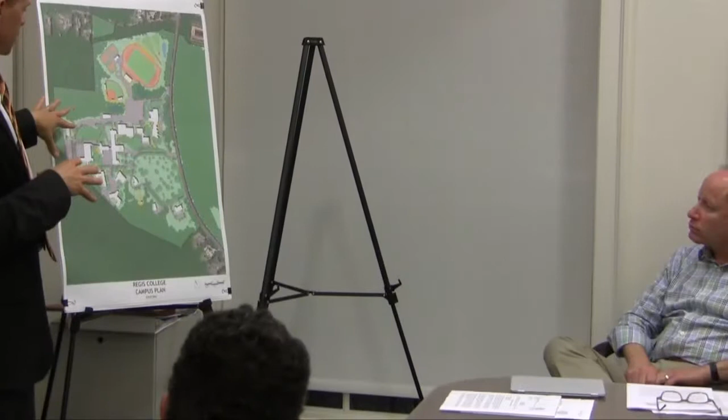We'll move through this relatively quickly to keep in the time frame. Just to orient people, we were here a month or two ago. Orientation of Wellesley Street here on the side. This is the existing conditions for the campus: the Great Lawn, College Hall, the main academic building, and sports fields to the north. We're really addressing the core here, specifically the addition to Maria Hall that was discussed during the site walk this morning.

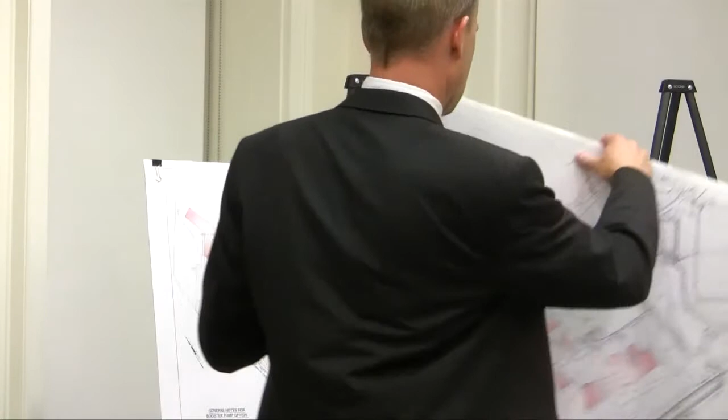President Hayes mentioned that part of the overall project deals with life safety issues, including upgrades to the physical plant at Regis College, both water and electrical, to address specific building issues. Steve will talk about that briefly. We have the water distribution and electrical distribution shown on these two drawings.

To go over the systems quickly, this utility upgrade on campus mainly consists of a water system and an electrical system. For the water system, we're proposing to install a new booster pump station for both domestic and fire flows on campus, to increase water pressures available at the top of the hill, since they're currently identified as somewhat deficient.

The new pump station is actually within the power plant garage, not outside as shown in this diagram. It will feed a new water loop around the upper campus, serving potential future sprinkling of Angela Hall, Domitilla Hall, Maria Hall (this project), the library, Alumni Hall, and St. Joseph's, which are currently sprinklered. It would also bring water service down to potentially sprinkler Spelman, Walters, and Morrison in the future. The science building, fine arts, and sports would remain on their existing fire pumps for fire protection. This really helps improve life safety on campus.

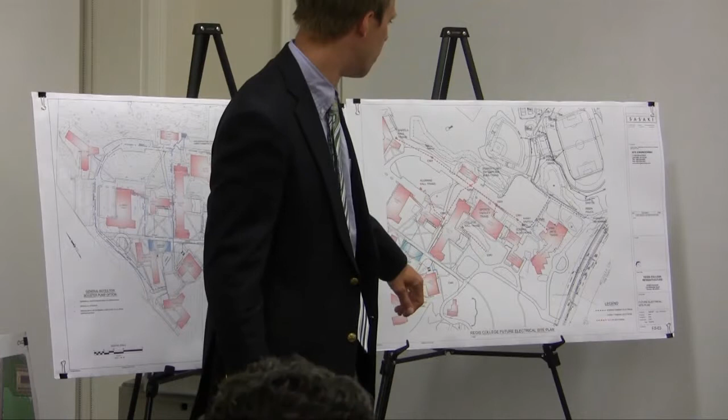Also, for the electrical system upgrades, the green line shows the proposed phase 1 electrical system upgrades to improve reliability and efficiency, serving some of the new development on campus. Basically, we're upgrading the transformers to raise the line voltage up to basic standards of the electric system. That's the plan, in a nutshell, for the campus utility systems.

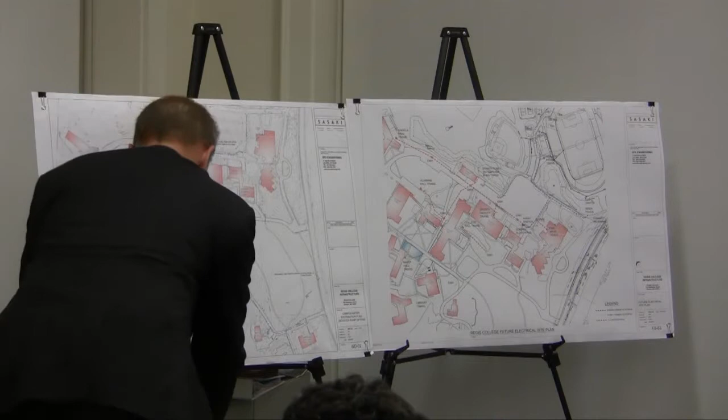Continuing on to the landscape. Now I'm going to zoom in to the core of the campus here.

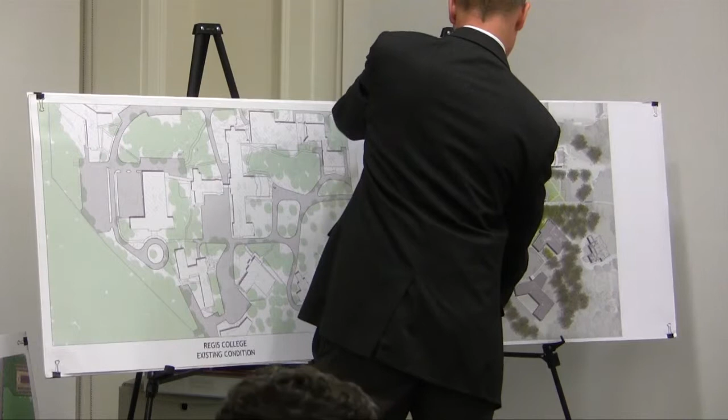Okay, again, existing conditions over here on the left-hand side. We have the great lawn here, existing drop-off, College Hall in the front here. This is where our site walk was today: St. Joseph's Hall, the Student Union, Maria Hall, and the library.

To revisit briefly from Phase 1A: Phase 1A and 1B have been consolidated into one phase after discussions with the trustees and the administration at Regis. That was seen as the least disruptive and most economical way to do the project, since we're building this building and can do the site work at the same time. A big part of that is removal of the parking in the core of campus, removal of this roadway, replacing that with a new quad here and with a new College Walk, open for fire and service vehicles but primarily a pedestrian walking space.

As part of these upgrades to the campus in general, we're also thinking very carefully about ADA accessibility: a new ADA entrance into St. Joseph's that will tie into the existing ADA entrance into the back of College Hall, also a new ADA entrance into the library, and this building will be accessible with a new elevator as well, so two new landscape spaces on the north and south of the building.

The last time we were here, we talked a little about the reconfiguration of the roadway behind the building. Currently it ends here with the drop-off at the Student Union. That will be connected here, with the new drop-off in this residential core.

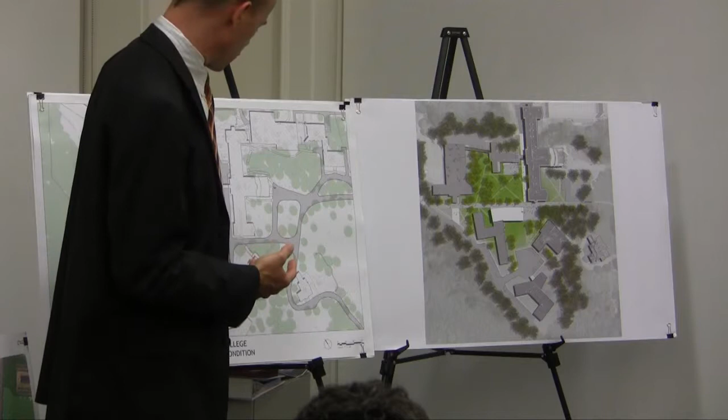We are addressing the issues we brought up last time. You can see on the gray line here the existing compactor that's across the boundary, and the request from the Conservation Commission was to put that back on Regis's land. So this parking is being formalized a bit, also after discussions with the fire department to make for safer turns here and to put the compactor on Regis property.

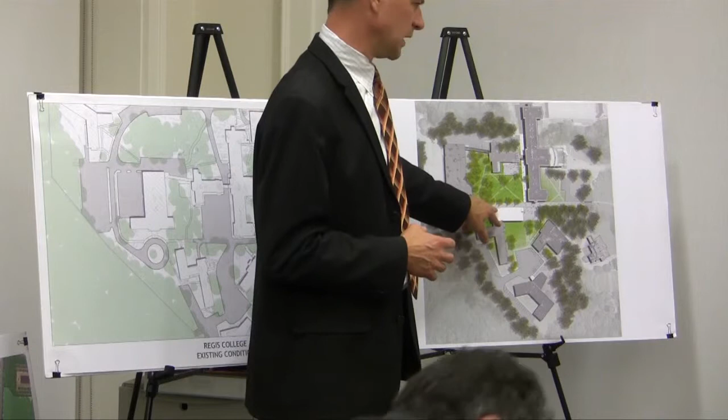Okay, so now we'd really like to get into some of the details about the building, the addition to Maria Hall, and Vinicius and our architecture team will address those.

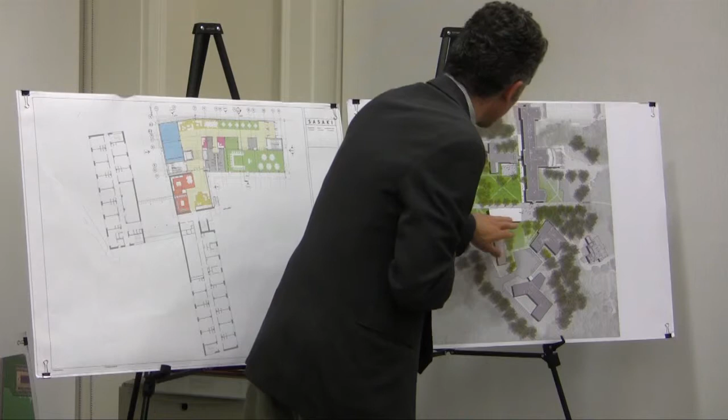Take this site plan as the reference. The idea for the addition to Maria Hall was to do a couple of things. First, to piggyback on this idea of a great new green and a south green, and create an entry level for the residence hall that is really a piano nobile for the residential life portion of this program, accommodating an engagement space for the students and a couple of flexible classroom engagement spaces that can be used by the campus and by the community of the residence hall.

Through this new accessible entrance, we provide a new elevator that gives accessibility for the entire hall, which doesn't exist today. At the end of the pike, we have a new fitness center and a yoga classroom space that promotes health as part of this whole complex.

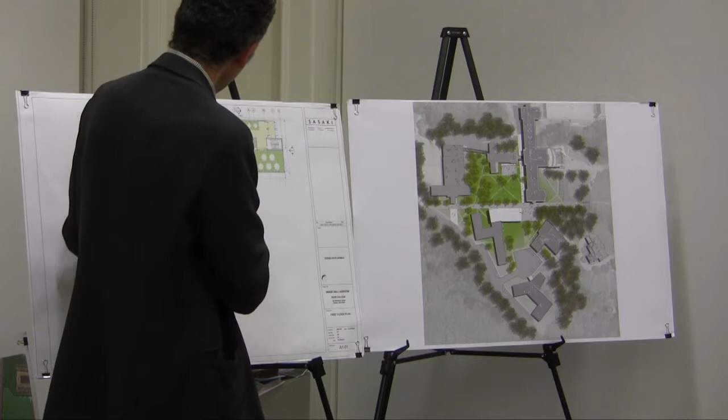Very importantly, with the elevator and new stairs addressing the grades here, we take this existing space, which is the current lobby entry, and create a living room, dining, and laundry experience that becomes the knuckle where the old and the new come together. It's very important when dealing with residential life to make sure that when we're adding, we're bringing up the quality for the entire complex. So that was very important.

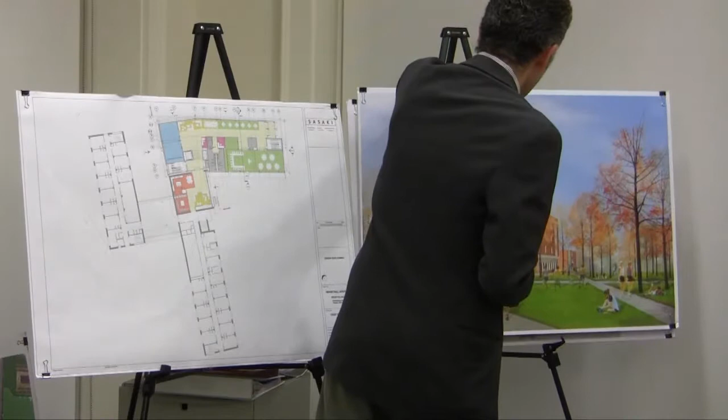So the idea of this entry pavilion, so to speak, is that—this is a view taken from, if we're standing on the green here looking back at the addition to Maria Hall—this is the view we will be developing.

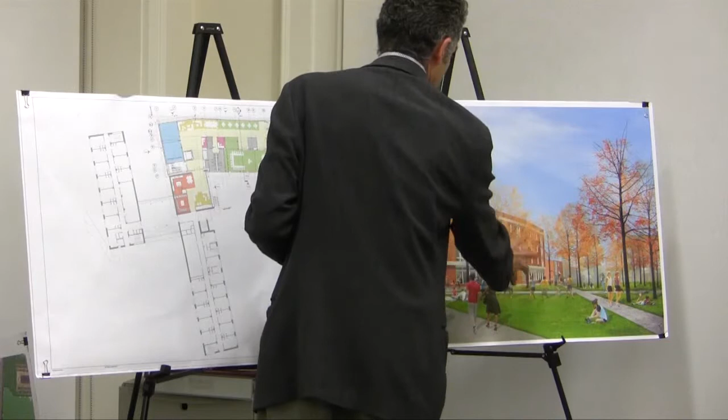Coming in from the main approach from the library, the new entry plaza for the library would be here, and you have the main entrance to the hall over there. You have a lot of transparency here, which means the life of the building now participates in the life of the quad—lots of eyes on the quad and vice versa, so there's a sense of belonging and a sense of safety associated with that.

Also, as you see in the upper levels, the promotion of lounge spaces at the very crown of the building creates an important element from a residential life perspective. The building, in limestone and brick, is very consistent with the palette of the campus and responds to the idea of the new green.

Finally, these classrooms and function spaces can open up to the south, to this new lawn, which is nice because some of the pedagogical functions can expand into the landscape, something the campus prizes a lot.

If we go upstairs, again, using the elevator or the set of stairs, this is a typical upper floor. What we are doing here is promoting a couple of things. First, right off the elevator, we have the fully accessible unit, ADA compliant, so it's very easily accessible from the main point of arrival upstairs.

We kept the length of the corridor short. We have a unit typology here that is suite style. We don't have kitchens, but we offer living rooms within the suites. And this typology is in fact a complement to the other typology here, which is a standard double-loaded corridor configuration.

At the second floor, we have a bridge over that living room space that connects to the existing residence hall and promotes accessibility throughout the building. We're also sprinkling the rest of Maria Hall as we do this work, so from a life safety standpoint, we're bringing that building up to standard along with ADA, which is a plus when talking to the fire marshal.

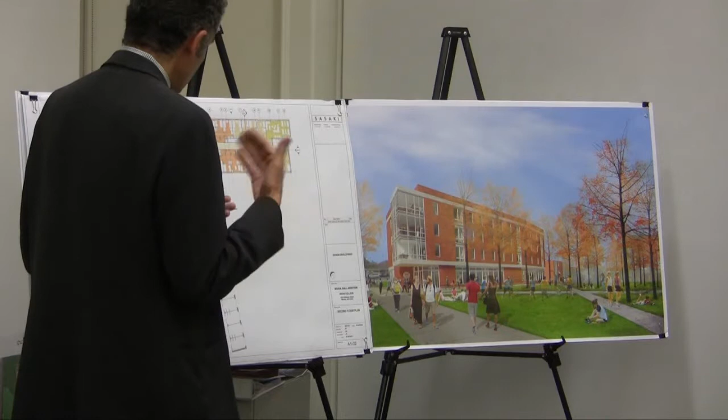And then finally, at each of the residential levels, we have a nice lounge at the corner of the building that participates with the green as well and creates a sense of community for the residents.

Don't you want to move in? Now that it's co-ed. Good.

A couple of questions. If that's the end of the presentation?

We made a couple of observations at the site today. One of them had to do with site lighting and the possibility of taking a look at some of the bigger floodlights that are lighting the parking areas, and seeing if there might be some alternative, because they tend to really glow up in the night sky if it's misty, for example.

So that was one point that was raised at the site walk. And then the other thing I think we ought to touch on is, since the roadways on campus are changing, how does that impact the traffic patterns on Wellesley Street, if at all, and with the addition of the new dormitory, do you anticipate that will add vehicles to the campus, and if so, do you have a projection of how many? So those two linked questions occur to me.

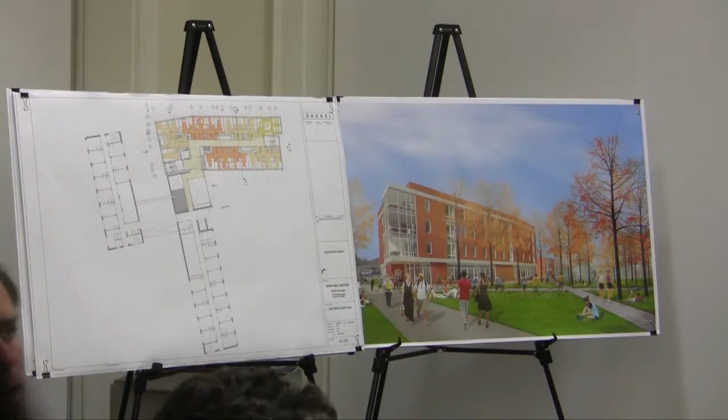Yeah, I vaguely remember the traffic study, but the problem was we were only focused on this parking lot next to the stamp museum. The study reflected this building being in the impact area. Yeah, I don't remember there being a major impact. Most of the traffic continues to come into the main lower lot, that's where all the traffic goes, and that will not change.

So I'm trying to go through this. I'm not a traffic engineer myself, but I'll tell you what we basically found with the modeling on this. We looked at peak flows over a couple of days in each of the driveways and turning movements in each one.

We also ran a traffic counter over 2 days, left it out there. This shows the volumes. What we noted here is that the traffic volumes on Wellesley Street, the red and green graphs at the bottom, don't necessarily align with the peak volumes going in and out of the campus, which are the purple and orange volumes. So as far as traffic on Wellesley Street, there's some advantage in the fact that we aren't necessarily at the same peak as the commuting traffic.

Also, when we did the Synchro analysis on the turning movements, we found minimal delays for left turning. Really, the only delay happens when there's left turning cars, because there's no dedicated left turn lane for cars turning left into the campus. And the potential delays of people trying to get around those cars making left turns - we determined that currently it's level of service A.

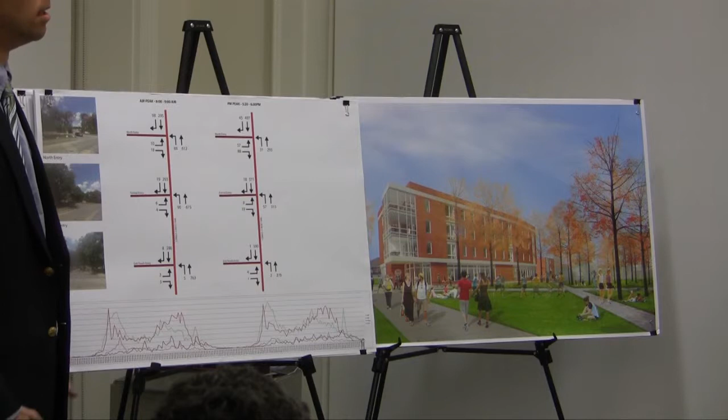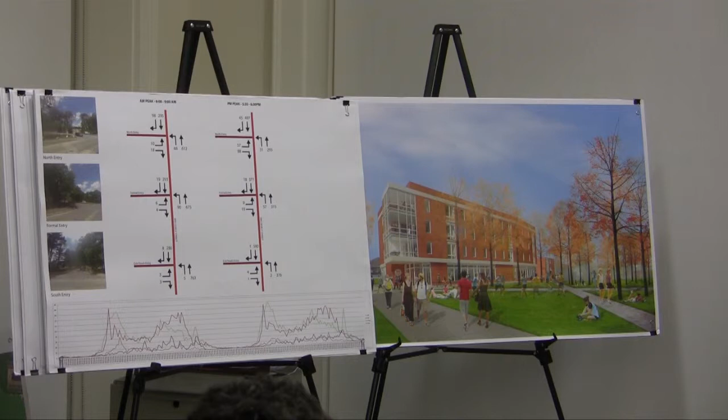The move will change the traffic patterns on campus. There could be some impacts to that, but the feeling was that we're adding, I think, 10 spaces to the campus, so the overall volume shouldn't change much. There could be some minor changes to the distribution between the driveways, but with the volume still limited, the change would be that maybe cars shift up to the upper entrance as opposed to the central entrance. Or I think that was the conclusion, right?

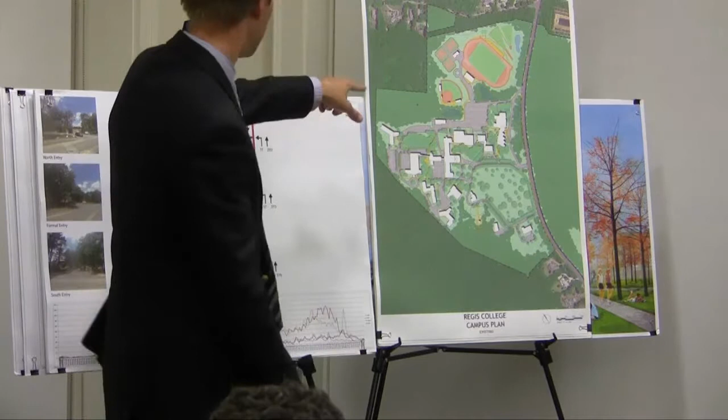Yeah, so this is existing conditions, of course. Currently, the bulk of the parking is in this north lot and a bit behind the student union building. So the bulk of the traffic, if you look at the circulation and the traffic volume, you see 98 cars turning in here at the morning peak versus 19 and 8 on the southern driveways. Going northbound, similarly, you see 2 cars, 57, the bulk going in the middle driveway, and as I come northbound in the afternoon, 31 here on 5, 90, 68. So the bulk of the traffic is between the north and the middle driveway.

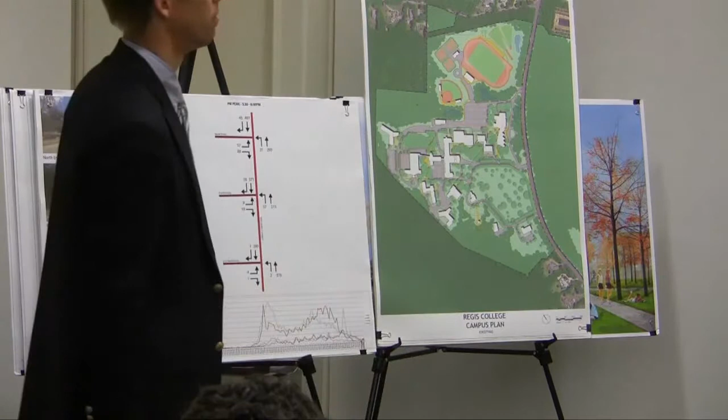But that would shift all to the north, right? Because the middle - it wouldn't. There's going to be more spaces down here. We're taking out these spaces from the middle and moving 72 of them down here, so that it distributes it. We're not necessarily adding any more to the north, but actually adding more to the south, which currently has very little traffic.

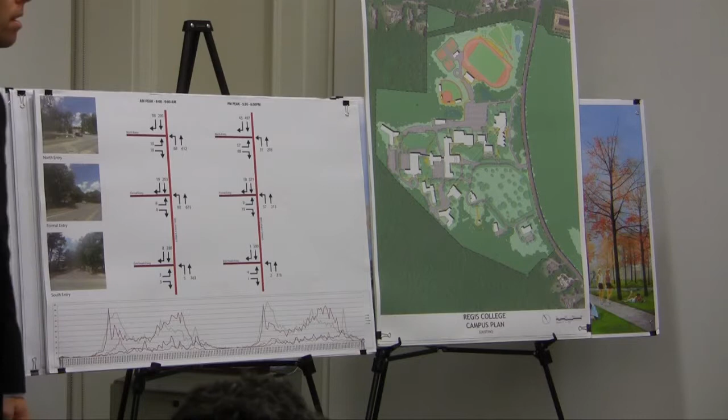Okay. And the lighting - dark sky compliant kinds of lights.

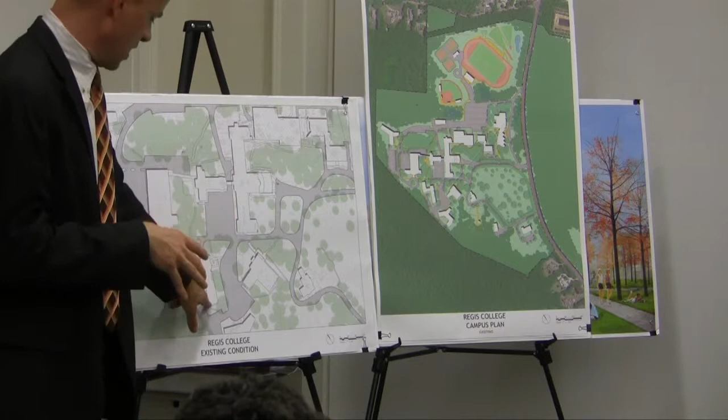So on lighting, for everybody who wasn't at the walkthrough this morning, we specifically went and looked at some of the current lighting on these parking lots at the rear of these buildings, and they tend to be lit up with large floodlights on the top of the rear of these buildings. So the conversation this morning was, could we take a look at this lighting and think of the new campus lighting standard they're looking at when we do the work on this back roadway? I think the response from Regis was, sure, we'd absolutely like to look at that and have it considered by our lighting designer.

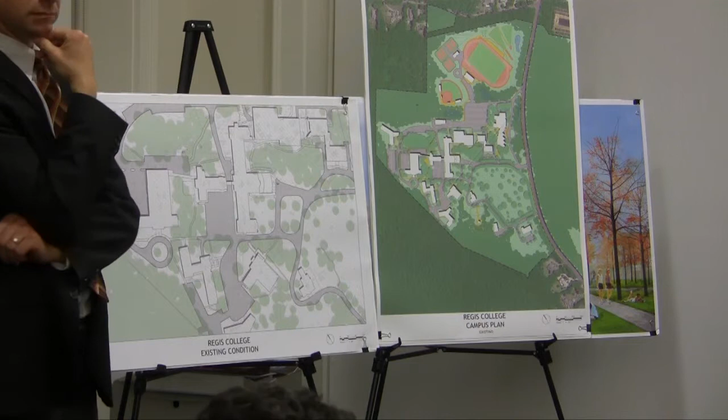I also want to add that we know we want to make some changes now that we're putting a green quad in there instead of a parking lot. That's going to change - aesthetically, we want to tone it down as well. But in the back of the buildings, we have to also consider safety, and we have cameras and things like that, so the lighting has to be sufficient for the cameras to do their work. So we'd keep that in mind as well, but certainly keep all of that in consideration.

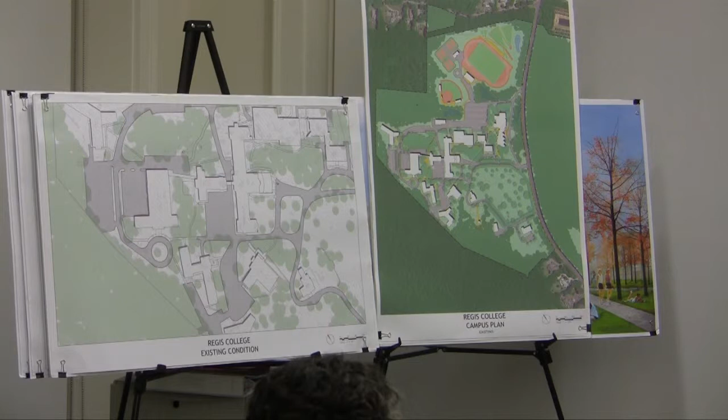The dark sky stuff doesn't necessarily mean low lighting. It means putting light where you want it, as opposed to all over the sky. All the new fixtures proposed are almost all LED, full cutoff, compared to the current fixtures out there, which have these big high pressure sodium yellow lights just kind of cascading on the parking lots.

They're good for security. Yeah, they're good for security. I had a professor say once they're good for poultry barns too.

We're looking, over the period of the 15 years, which is the total master planning process, to upgrade the lighting throughout the whole campus.

Are you also planning an irrigation system for watering the grass, and if so, have you thought about a well so you're not bringing more water into town? We try to balance our water budget with flooding and such. Currently the only irrigation we have is on our softball field. There's no irrigation on the front lawn, and it's done well. We talked about irrigation up in the quad area, but I've been convinced, because of its location, that we don't need to add irrigation there, so there are no immediate plans. That beautiful front lawn isn't irrigated—isn't that amazing? We keep the grass a little longer, about 6 inches, but it's like carpet, it's gorgeous.